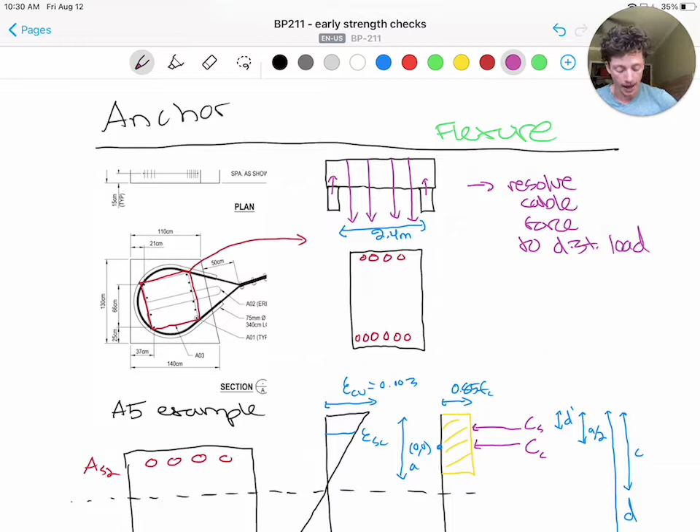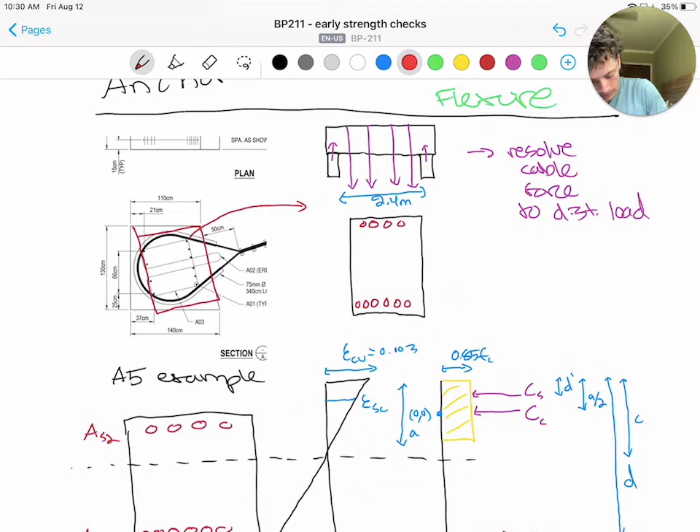Once again, I've drawn out - and this is actually incorrect. Remember, we're going to be taking the section that's the smallest rectangle within the anchor, and we'll use that to find our section and run our analysis.

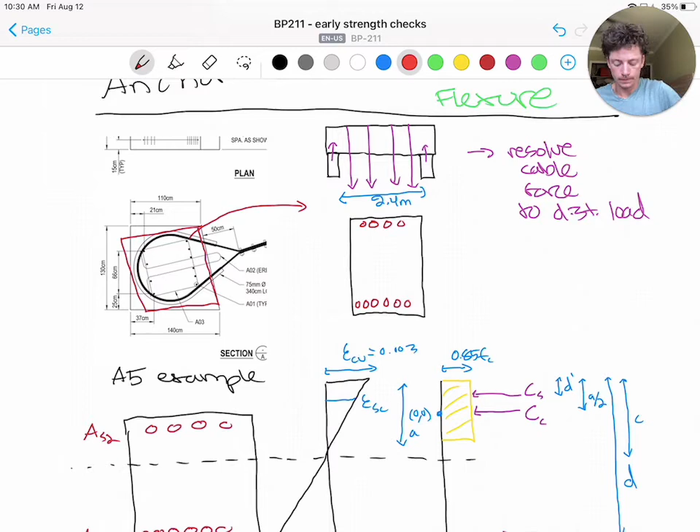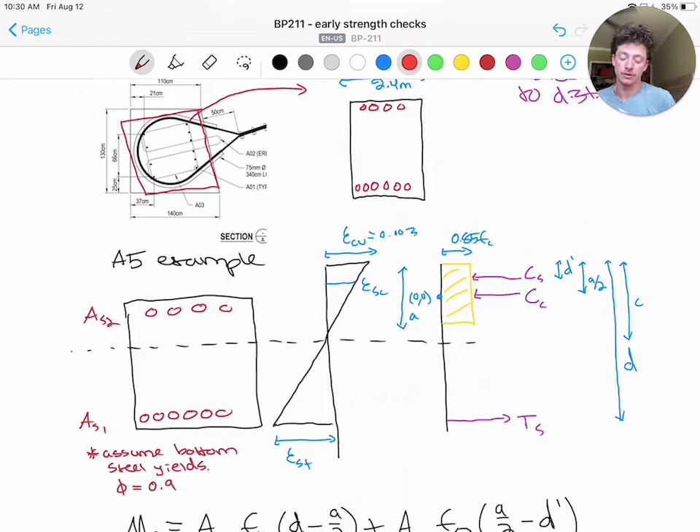Once again, I've drawn out the stress strain diagrams. We're actually going to ignore that top steel for simplicity, ignore that compression steel, and look at this as a singly reinforced beam. We can ignore this section here.

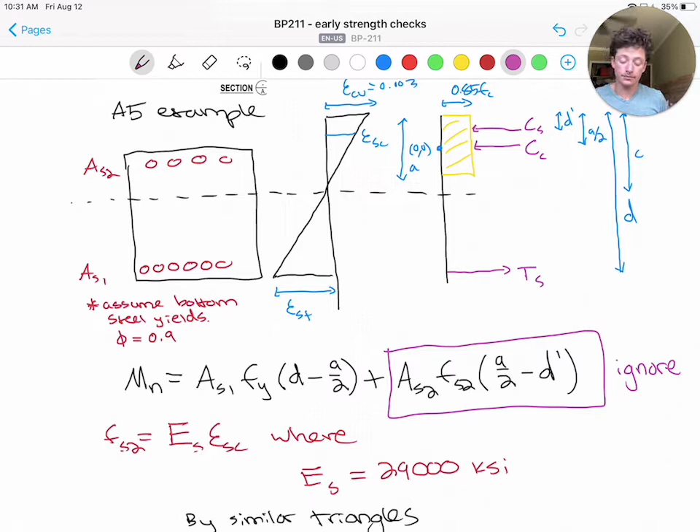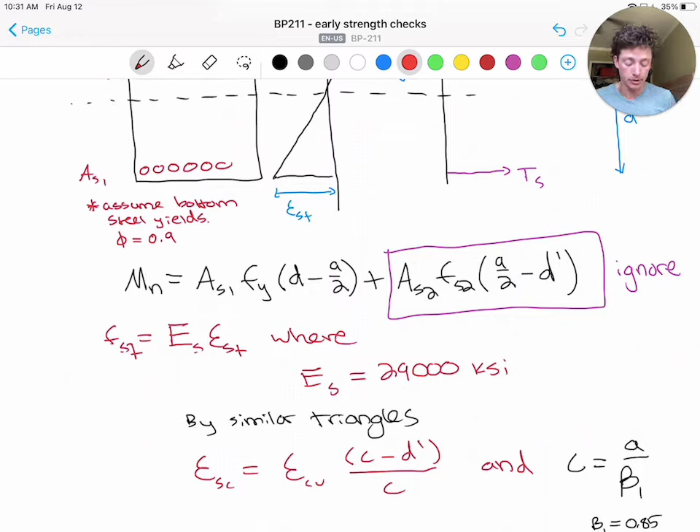And we can rearrange our Mn in order to back calculate the amount of days we need to have sufficient capacity. As you may remember from the anchor design section, this equation will apply also for what we'll call FST, the tension steel, and epsilon ST for the tension steel, and we want to use that to confirm that our tension steel is yielding, so we can use a phi value of 0.9.

And we'll do that by similar triangles. And for the shear condition, we'll follow the same process as the anchor design as well.

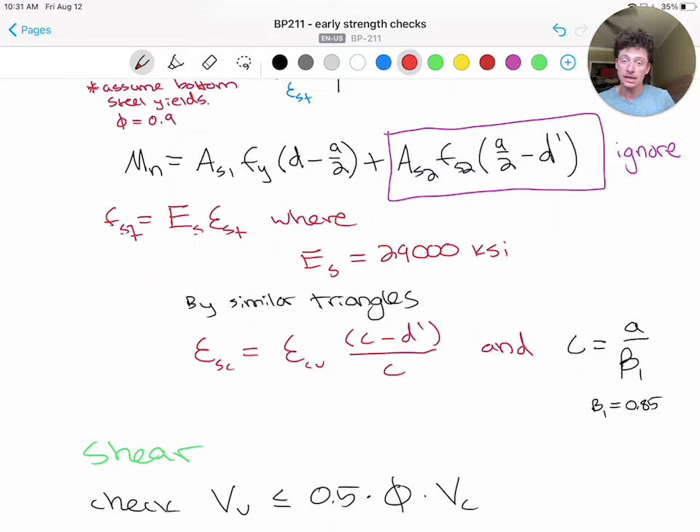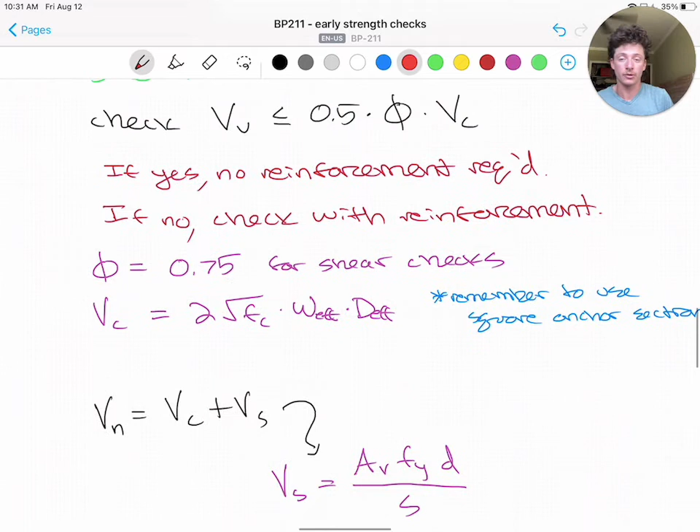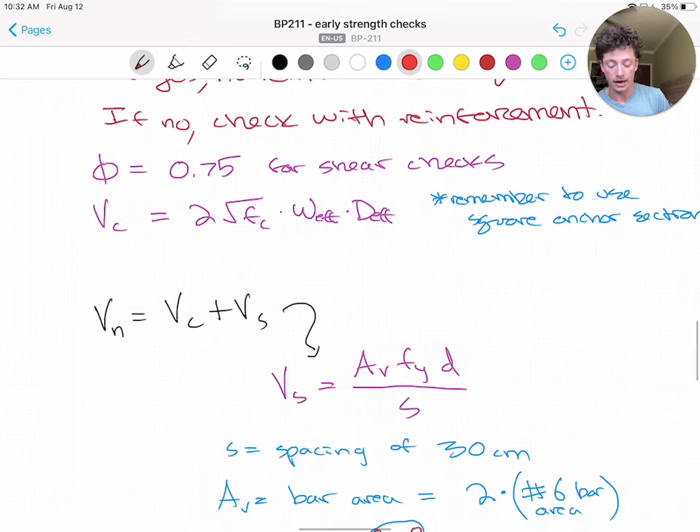Under the different loading, we can rearrange, and this is the same process that I've outlined in the anchor design section. We first want to see if we need reinforcement required at all, and if we do, we can add the shear strength of the reinforcement into our equation. So when we're checking our capacity, our Vn is now the shear strength of the concrete plus the shear strength of the reinforcement. And we can rearrange that to find our F prime C required.

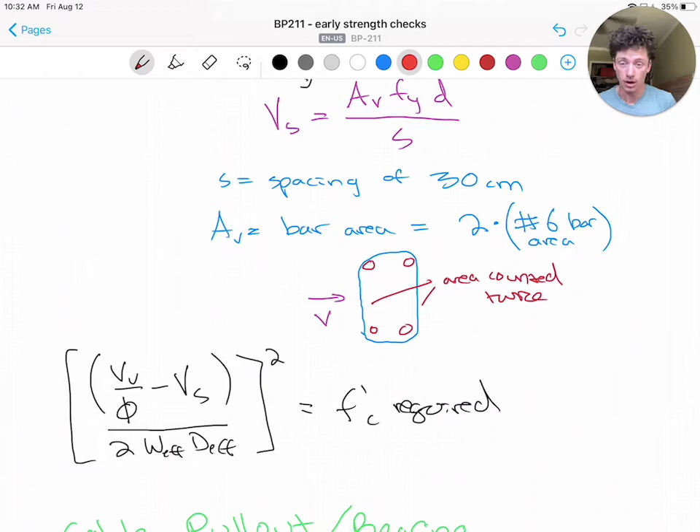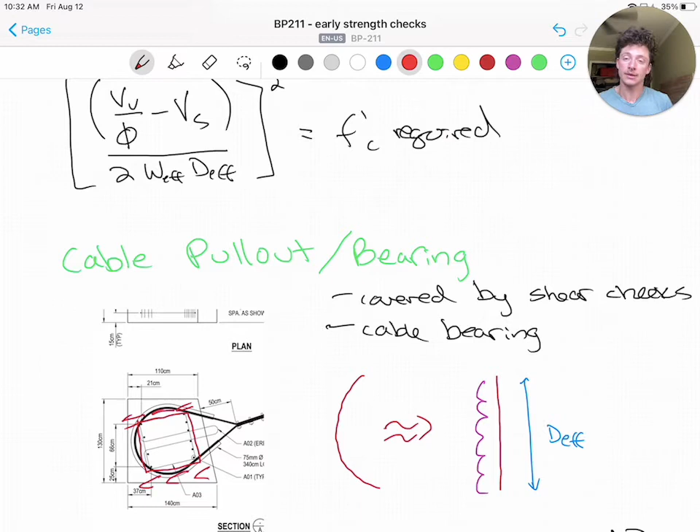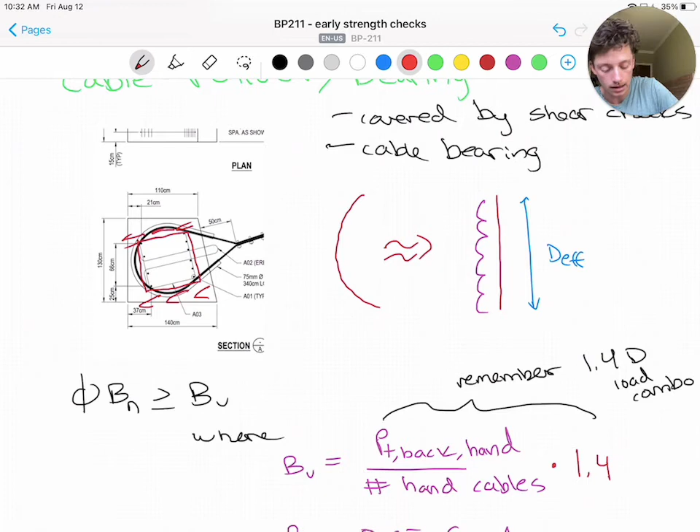And then finally, for cable pullout and bearing, we are going to, as you may guess, follow the same process from the anchor design section under the new loading condition, and we just want to make sure that we are checking using the 1.4 dead load combination. We want to check that our bearing capacity times the load factor is greater than our load experienced.

These are the equations, once again, from ACI 318 2011, and I mentioned this in the anchor design section, and I'll mention it again here. We want to make sure for this specific case that we are looking not just at all of the cable forces, but we want to be looking at a single cable force.

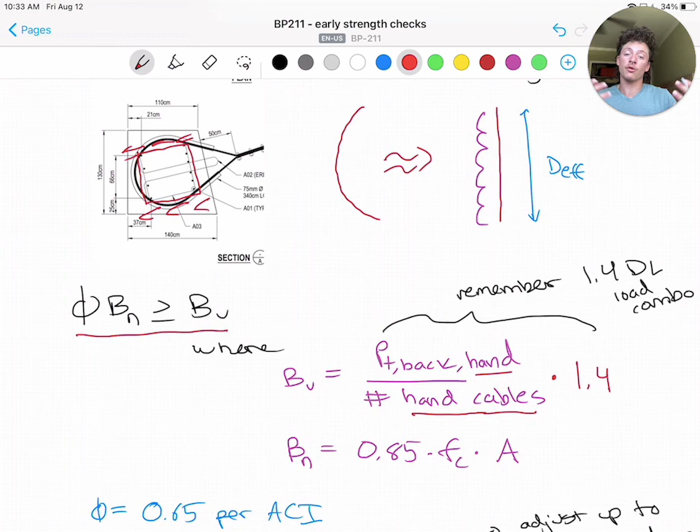We want to be breaking that up, and we can look at what is most conservative, whether that's a handrail cable or walkway. It'll be the handrail, so I have hand mentioned in here, because we're using the handrail cable to do this calculation, because it's going to generate the largest force, and it's going to be the most conservative value to look at.

And finally, we can rearrange that F prime C required in order to get the amount of days that we need to wait before we can hoist or we can deck.